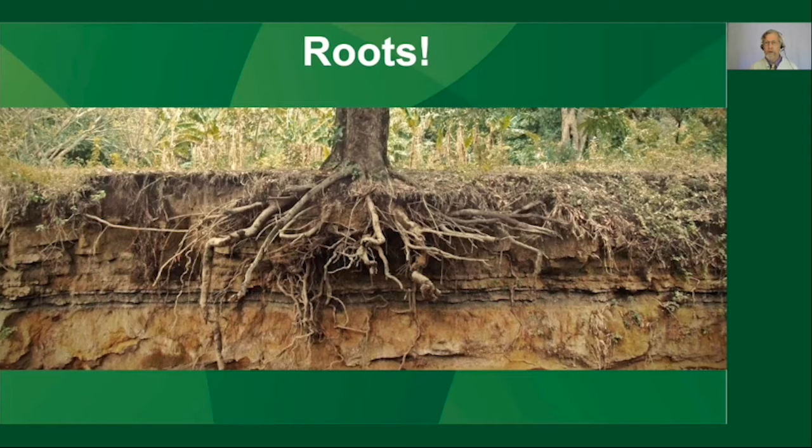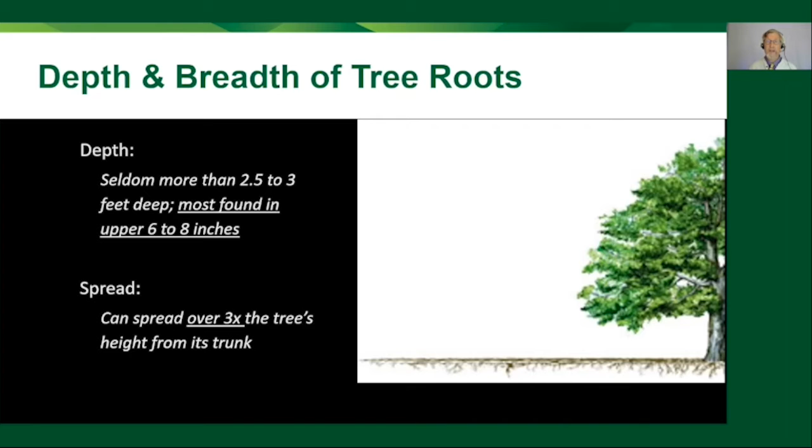And you have to be able to explain to engineers who might not understand how tree roots grow, or your architects or even landscape architects, that usually in nature, tree roots don't grow that deep. And they usually spread very wide, a lot wider than most people think. And whatever you're designing for has to accommodate that. And also there's this idea of a tap root that everybody has ingrained in their head, and people are worried about it when you're growing a tree on a rooftop. Won't the tap root break through the rooftop? So you have to be aware of how roots really grow and be able to educate your team on the reality of root growth.

So let's look at the different types of roots we have. We have the structural root zone and the biological root zone, and how to accommodate these zones in your design. Anchorage really depends primarily on 7 items, and I'll just go through them quickly here. The soil that you're using must resist fracturing. In other words, the shear strength of the soil needs to be adequate to hold the tree upright. The windward roots of the tree, the ones that are growing against the wind, must resist pulling out of the ground and breaking in tension as they move with the wind.

Likewise, the leeward roots must resist buckling in compression, and that soil underneath has to give the roots something to hold on to and something to press against, so the tree won't move too much. The roots must be strong in cross section, so you have to have good root growth, and large roots near the stem of the tree must resist delamination near the soil. So the root contact with the soil, and the soil, is very important.

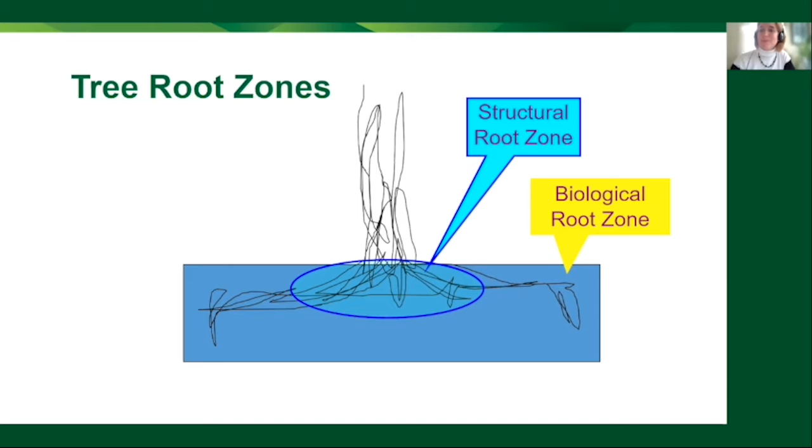And the soil must remain at less than the water content of its plasticity. In other words, once soils become too wet and the tree starts moving in the wind, they become plastic. So it's easier for the tree to fall over than with well-drained soil. Fortunately, most engineered soils for elevated landscapes are well drained, but not very cohesive. So we'll get to that.

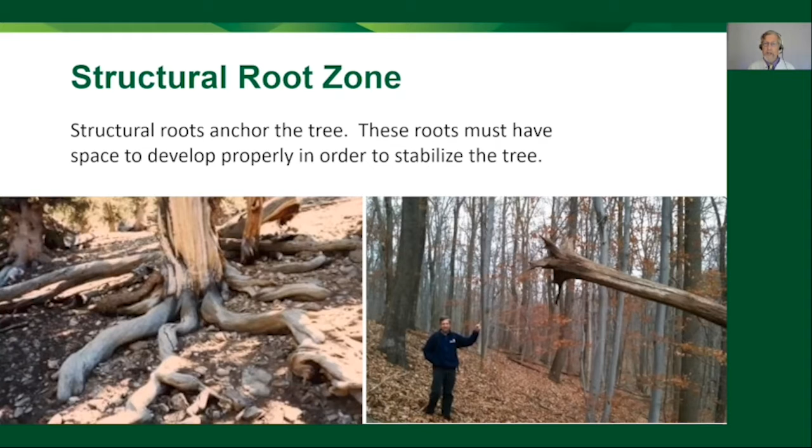Right. So the structural root zone is these large, rapidly tapering woody roots that are closest to the trunk. And establishing these roots early and designing around them helps establish proper anchoring within this system that you're creating to hold the trees.

And you have to talk also about the biological root zone, and all this biology within the soil must be healthy in order for the tree to survive. In a teaspoonful of healthy soil, there are more microbes than there are people on the planet. And in a handful of healthy soil, there's more biodiversity in just the bacterial community than you will find in all the animals in the Amazon forest.

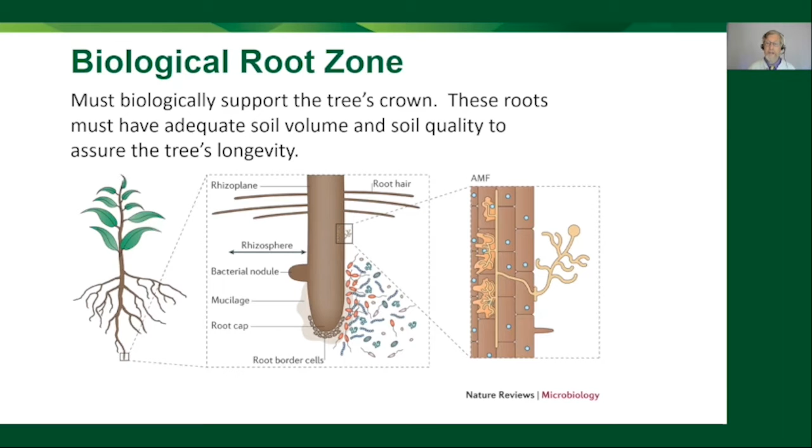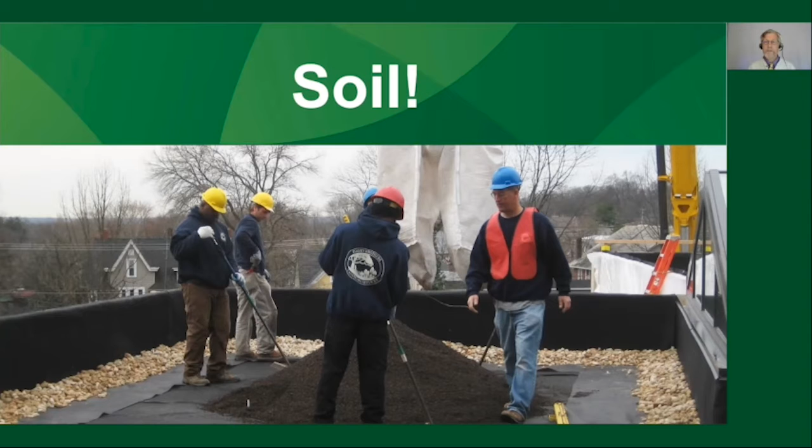And people have to realize that when they're talking about soils and the biological root zone, because really good soils make good trees. That's true for the trees that we plant on the ground. It's also true for trees that we're going to plant on top of buildings as well. So let's talk about soil. All the soil on an elevated rooftop project is going to be manufactured and engineered. And this creates some problems and some opportunities that we're going to go into later on in the presentation.

But a main thing is providing as much soil as possible for that tree. So as we see here, larger trees need more soil. And this is, of course, based on a lot of work that's been done on at-ground trees, but the same is true for trees on elevated surfaces. And so, as designers, we really rely on research like the research here presented by James Urban, summarizing street tree studies on how much volume you need in order to maintain a given size.

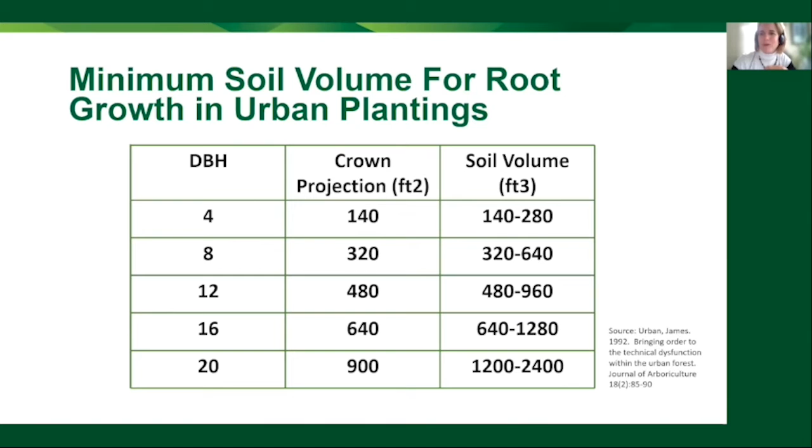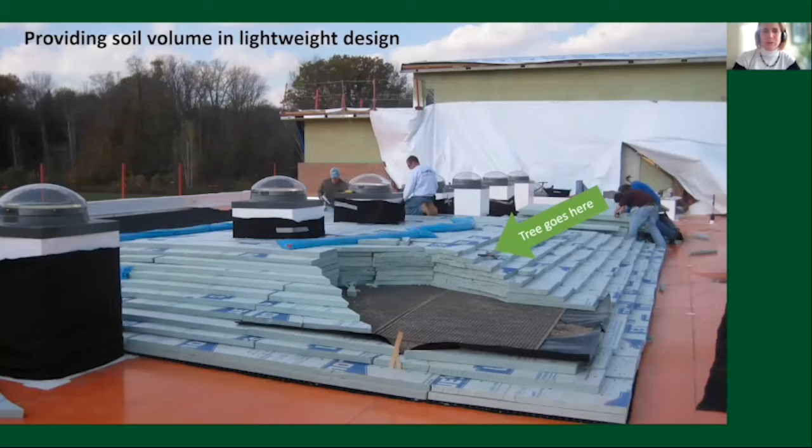So here's one possible creative outcome. This is a green roofing construction. The blue stacked material you see is lightweight insulation. It's creating lightweight terrain within the weight limits we have. The soil's not been placed. So the tree goes in this scooped out area. And then there will be probably 12 or 18 inches of soil, 8 inches of soil, the designer can decide, that gets placed on top of that insulation. So the root volume has a deep zone near the tree and a shallow zone throughout the rest of the landscape for the feeder roots. That's one solution. Go to the next slide.

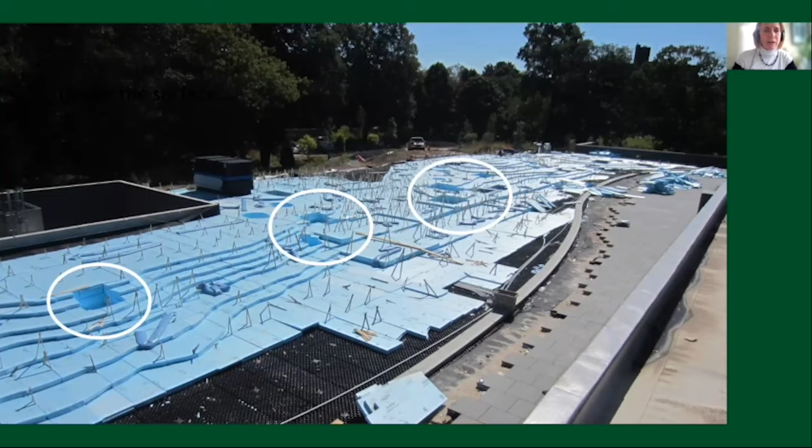Here's another one. This is at Lakeside Prospect Park in New York. And here you see a lightweight landscape that's going in for a new park facility, where the building sort of slides into the landscape. And the white circled areas, again, are areas for trees. You can see they've carved out deeper areas for the tree root ball and the structural root. And so the key question that comes up for us when we're thinking as arborists or as designers is, how big do those need to be?

And I would argue these are really for a smaller tree, that in order to accommodate the appropriate structural roots and the supporting structural root flare, as Jason was saying, those holes need to be sized wide enough that the tree can maintain its stability, in addition to whatever it's doing with its feeder roots and the shallow root zones in between. Make sense?

Just for you arborists, you see that most of the area is this lightweight styrofoam, and the growth medium, it's not really soil, is put on top of that. So you might think we're using a lot of soil media on these rooftops, but actually the blue foam is lighter, and it provides a substrate to hold that soil down and not weigh down the rooftop. Yeah, it lets us create terrain without adding weight.

So here it is. Here's what it looks like when it's finished. This is that same landscape finish. So the trees and the shrubs that you see on the right-hand side of the photo are all on structure. Those are newly planted on structure. Actually, the trees in the foreground on the left are also on structure. And as Jason said, the methodology typically tends to be more breadth, less depth. That's when I was joking that the tree root geometry sort of works in our favor.

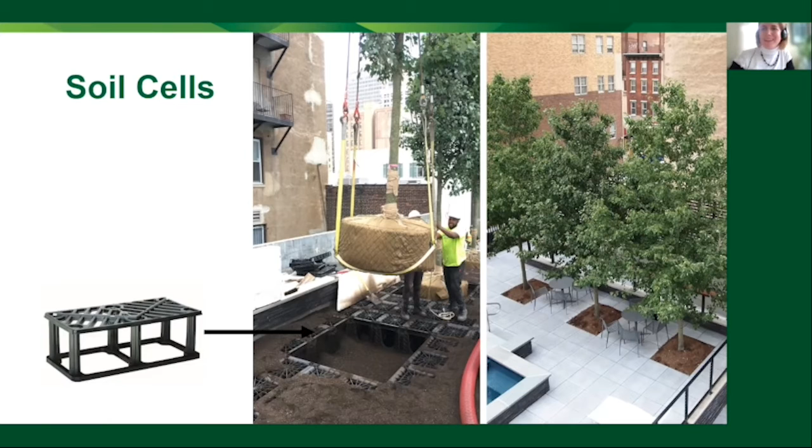If anybody here is in product development or knows someone who's in product development for these kinds of soil cells, modules, it'd be great to have more adaptions and more accessories that let them work better on structure. It's a little finicky taking these on-ground products and getting them on a rooftop. So more good conversations.

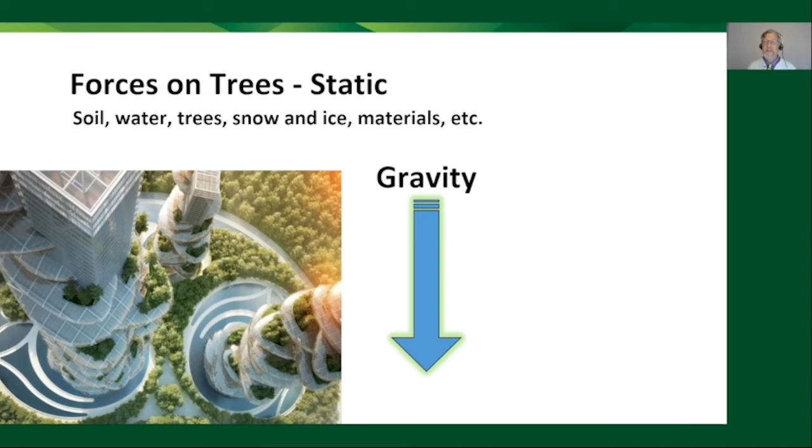So let's talk about the forces on trees, because you're going to be part of a team, and there's probably going to be engineers on that team, and you don't have to understand this, but you have to understand it conceptually. There's static and dynamic forces. So let's talk about static forces: the weight of the tree, the weight of the water, the weight of the rooftop, the roof material. And this is all reasonably understood in the engineering industry.

And they're pretty much quantitatively calculated, but the engineers don't know how much weight a mature tree has. They know how much weight the soil is, but it may be up to you to determine, well, this red maple, we expect it to achieve this size, and this is the weight of that tree. So the engineers understand what kind of static load that imparts to the rooftop.

So soil weight: green roof soil, engineered soil, is typically significantly lighter than normal soil. A common range in the industry is between 65 and 90 pounds per cubic foot. 80 to 85 is pretty safe. As you get down closer to 60, you tend to add cost because the growing medium becomes more expensive to adjust the recipe as the weight gets lighter. Normal soil, obviously, significantly heavier.

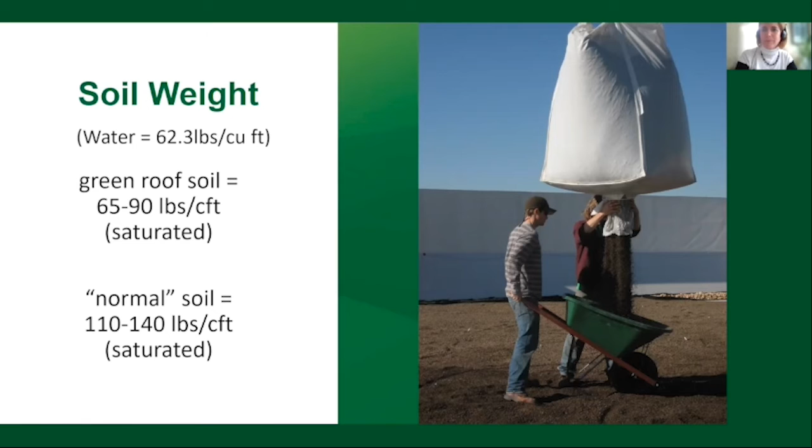And so even though, interestingly, that growing media costs more, it pays off because weight equals cost in other aspects of the building design. As weights get heavier, the structural engineering gets more robust, the size of the beams goes up. That affects architects' ceiling heights. So we find that optimizing the weight is absolutely key to being able to successfully keep trees in projects when we're talking about green roofs. So the lightweight soil pays off.

So when you translate the ideal depths for your size of tree to weight, you get a formula that says something like 30 to 36 inches. That translates to about 240, 250 pounds per square foot for saturated lightweight growing media. So think about those numbers for a second. 240, 250, somewhere in there is the weight of your soil. People worry about the weight of the tree, but I'm going to tell you right now that the weight of the soil is the far bigger driver.

If you think about the tree, when you look at the weight of a 20-inch tree, 3 tons sounds like a lot of weight, but when you convert that over the structural root plate, the bearing root plate of the tree itself, and this is where the math calls for some professional judgment, usually you end somewhere between 20 pounds, 30 pounds per square foot, maybe 40 pounds for a really big tree.

So 20, 30, 40 pounds per square foot is a small component compared to the saturated weight of the soil we were just talking about. So usually we end up somewhere around 300 pounds per square foot-ish. But then, that's where we start horse trading on tree height, tree size, soil depth, and our professional judgment becomes a key part of that conversation.

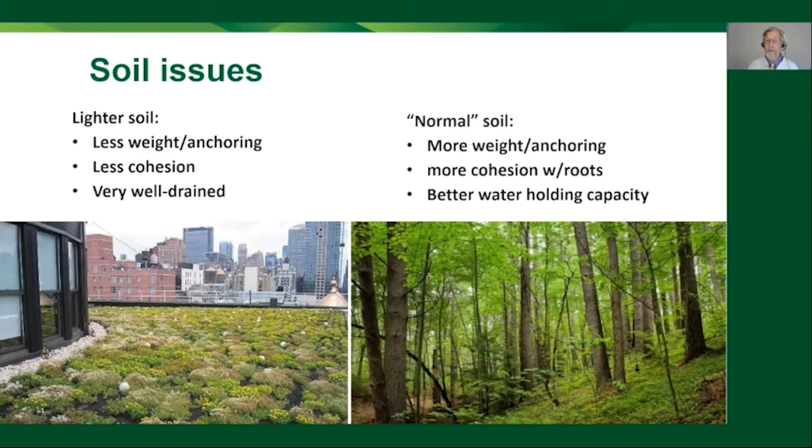And people think, well, let's add clay and things like that. But you have to be careful because, as Laura said, it drives up the weight of the growing medium. So we do have specifications now, but we as an industry definitely need better soil specifications for growing trees on rooftops. I'll add, Jason, those soils tend to be neutral to alkaline. So species selection tends to bias towards trees which are adapted for limestone ecologies. Right, instead of acid ecologies. Correct. But we'll talk about that later.

But healthy soil to me has always been living soil. For me, the soil is the most important part of this equation, because trees evolve with this underground food web, and they really need these fungal associations, these living organism associations to survive. On rooftops, that means supporting this biological component with this soil that's mixed and engineered. It doesn't mean just adding more organic matter to the soil, because that can be counterproductive, because that organic matter may be used up. It may make the soil more friable, so it might destabilize the tree.

What it does mean is that we as an industry need to develop specifications that add this living component to this dead soil as much as possible. It may mean that we need to go to a forest and dig up some healthy soil, and sort of seed it in, put it on top of this manufactured soil to start the process of introducing these living organisms into the soil. So really, we need a little more help with this, and a little better specification to assure long-term tree health.

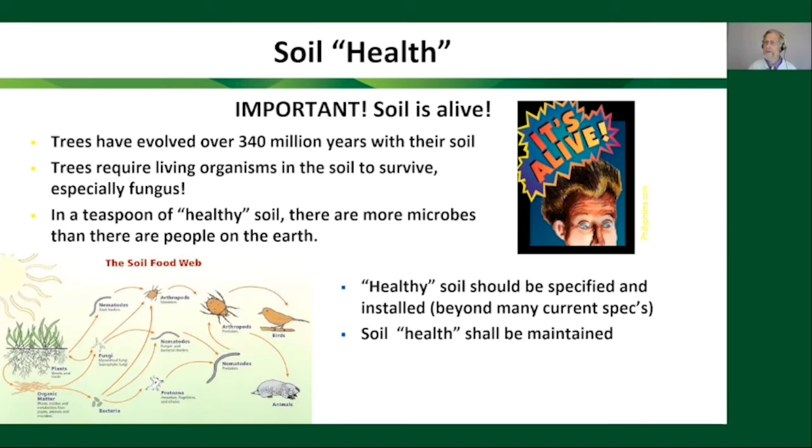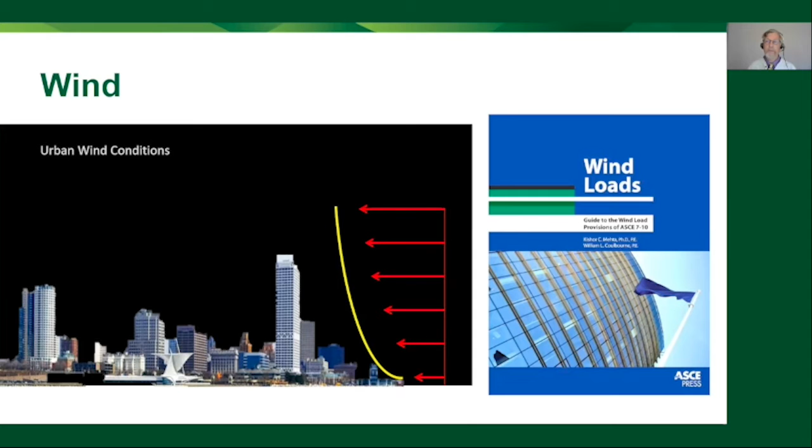So we talked about the static forces, the weight of the tree, the weight of the soil, the weight of water. Dynamic forces are really some of the great unknowns when we're designing rooftop tree gardens, because engineers like to have everything quantifiable, and the dynamic forces do present a challenge, because on trees, especially large trees, they're less understood and there's less guidance in the engineering documents. However, as the building height increases, usually in urban areas, the wind load increases, the wind speed increases. And especially when it goes around buildings that are nearby, you can have very complex wind conditions. But the wind loading on buildings is really well understood by engineers in building design. So we have to consider those dynamic forces of wind when we design these pits.

So again, when the wind comes in from one side, the opposite side pushes down on that roof structure. Now, with what kind of force? Well, it depends on the speed of the wind, the size of the tree, if it has leaves or not. It depends on a lot of things. Conversely, the opposite side of that root plate sort of lifts up in response to the wind. So really, we have to understand these dynamic forces and design for them as well. And it can become very complex.

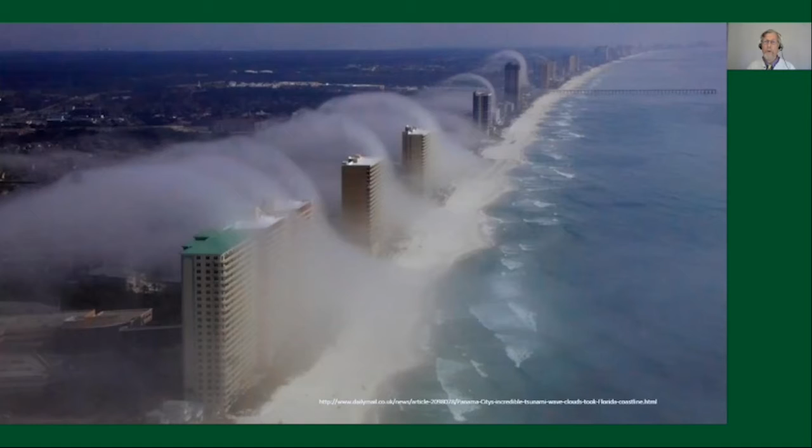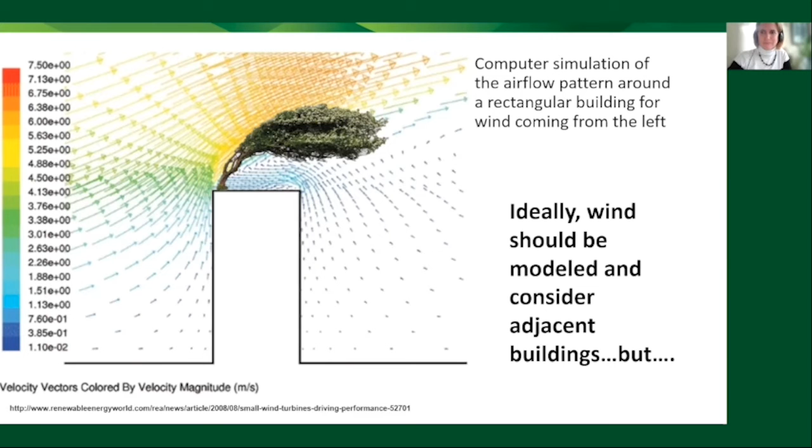So ideally, if you're putting large trees on rooftop structures, the wind should be modeled and should consider all the adjacent buildings. But a lot of times it's just not done. So here, I'll give you some practical examples, which I think are illuminating.

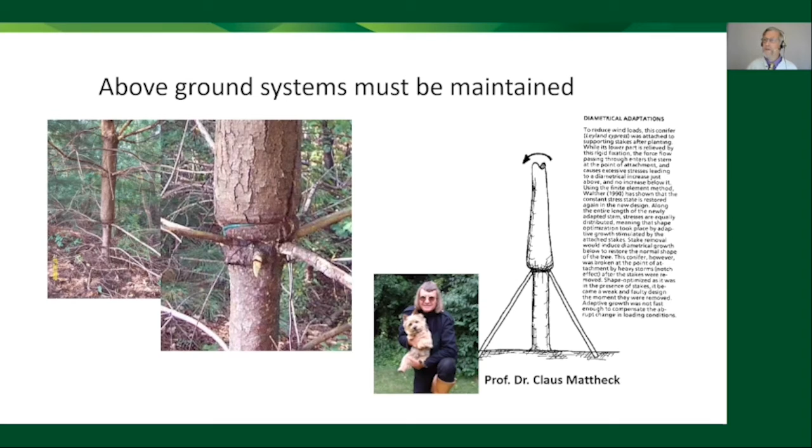So the arboricultural industry has standards for tree guying, and these are helpful to some extent, but usually they're for small or young trees, and usually the anchoring or guying is directly into the ground. When you're dealing with rooftops, you can't just punch a hole in the roof. You have to really design an anchoring system that will not harm the rooftop.

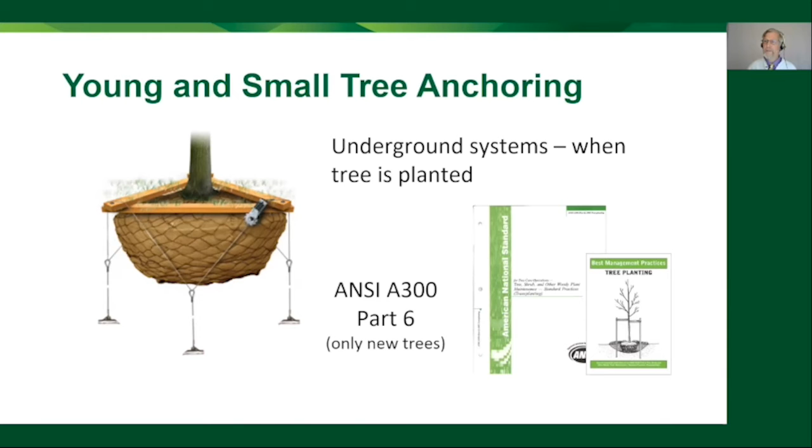So in that spirit, over the years, we have test-driven a number of anchoring systems that are based on a dead man or base plate approach, so that we're avoiding putting holes in the waterproofing, because fewer penetrations of the waterproofing means fewer potential flaws that could lead to a leak. And so here's a really early example of a buried frame that could be used to tether a root ball anchor. We can go to the next slide.

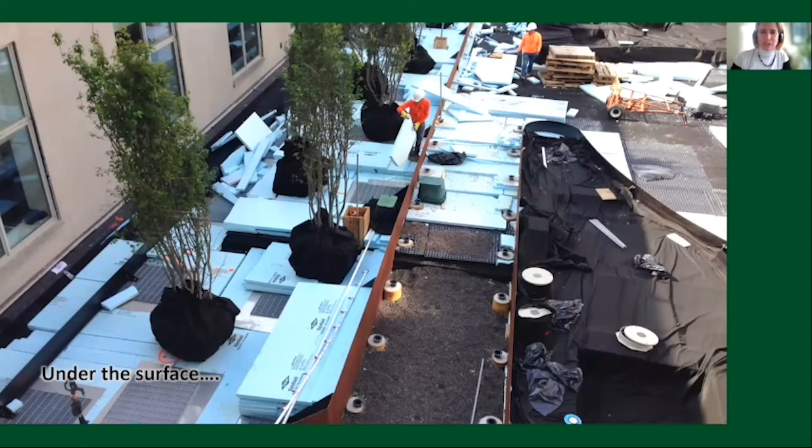Here's a later iteration. This is at Reading Hospital at their healing garden. And you can see the gray metal plates that are next to the trees. The trees are not yet placed on top of them, but those are the plates that are partly spreading out the point load of the root ball, and they're partly serving as a surface to which we can clip a root ball tether. So the tree stands on its own base plate, if you like, in this example. And is tethered to that base plate.

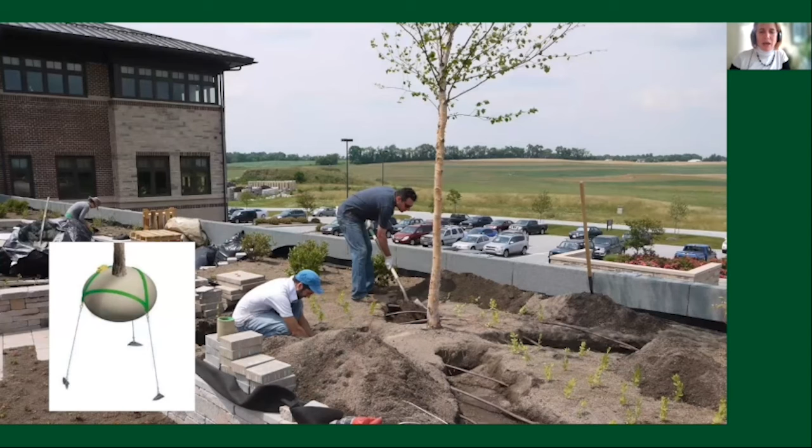So the weight of the tree and the weight of the medium helps hold that tree in the ground, hold it stable without puncturing any of the rooftop. Correct. And that works pretty well in moderate wind settings. I'm going to give you an example here from a high wind setting.

This is in Hanover, Pennsylvania, at Hanover Architectural Products. This is the roof of their warehouse. It's a showpiece, a showcase landscape. And it includes trees. And at the time of installation, these trees were intended to be tethered to the base plate, just like the example you saw. So here you see the tree going in, the brown lines you see are irrigation lines.

And you can see from the surrounding rural landscape, this rooftop gets exposed to a lot of wind. It's not very tall, but it's not sheltered. Get a lot of sweeping winds. Go to the next slide. So here's a photo from installation.

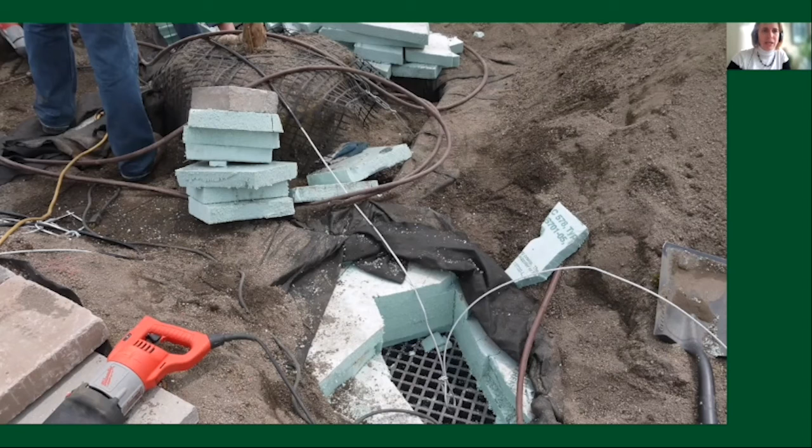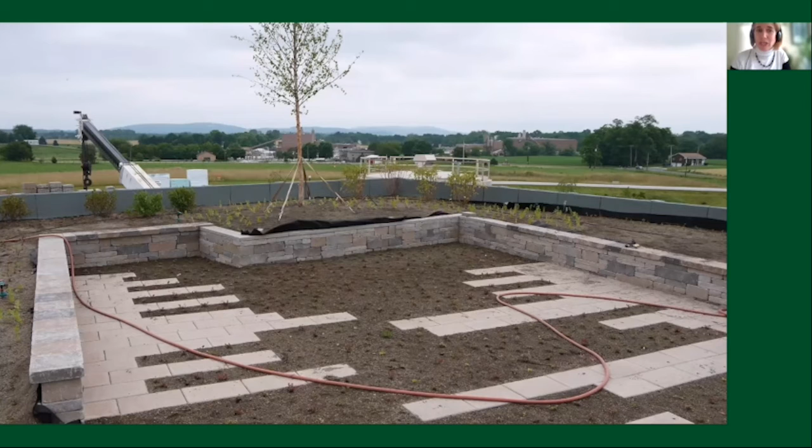They're taking the cables and anchoring them down to the lightweight fiberglass grate, which was a nice idea, but it didn't work very well. And if we go to the next slide, I can tell you that what happened, we had to change gears.

When the tree is under enough wind pressure, that wind is moving the top of the tree. And so even though we were anchoring the root ball, the top of the tree was moving enough that the trunk was starting to break free from the root ball. It was too much top movement in these high winds for this size tree. And so the team had to scramble and provide instead tethers that came further up the trunk.

And as you're probably already thinking, those ties aren't correct. They should be further up the tree and knotted differently. But you can see the scramble. You can imagine the scramble that costs in terms of having to say, whoops, need a different tethering system.

Right. And this is really different again from what we do on the ground because we can just stake the tree, drive stakes in the ground, but you can't drive stakes into the rooftop. You have to have a new and novel system to hold that tree upright. And our current standards don't address this at all.

This is why we need a new set of standards to address growing trees on rooftop structures to accommodate all the engineering needs and to accommodate the roof itself. And to be predictive, we need to predict what conditions we think we're going to have. Go to the next slide.

Because that tree there is just 2 stories up. So even 2 stories up above the surrounding environment can really increase the wind speed on that tree. Now the good news is that tree's doing really well. We keep track, so those river birch are doing quite well.

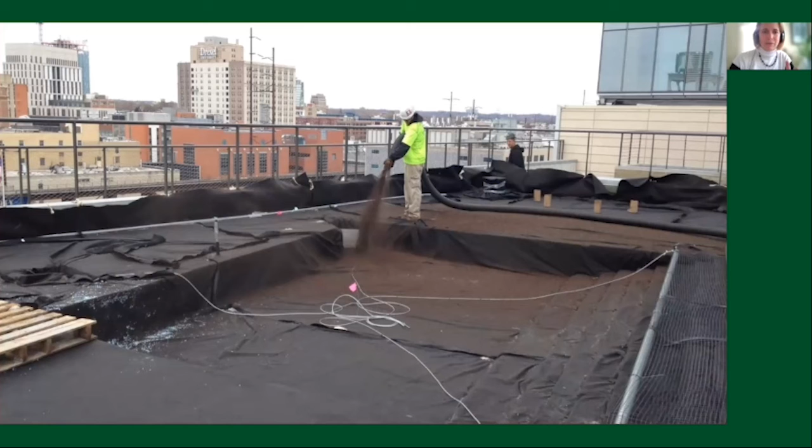Here you see the larger version of the opening and the lightweight insulation that makes the terrain, similar to what we were looking at before. It's covered with a black filter fabric, and the crew is starting to blow the engineered media in. It's brought up from the ground, in this case with a reverse vacuum process.

And the big opening you see is for the tree and the structural root zone of the tree. And here, instead of a dead man or instead of a small frame, we have actually got the ties ready for the tree that come back to a giant tie back, geogrid, which is underneath the soil. And that whole blanket of that whole layer of horizontal geogrid resists pullout the same way a tie back does on a retaining wall, or the same way your tablecloth does when you've got Thanksgiving dinner on it. So there's like a big tie back and curtain rod and tethers.

I just want to stress that these were not out of the box solutions. These were talked about and discussed and invented. They're novel solutions. But as we go and plant more trees on elevated structures, again, we need to have these as examples that work in the specifications. And this one turned out quite well. And we didn't have to put a bunch of holes in the roof or set roof anchors to do it.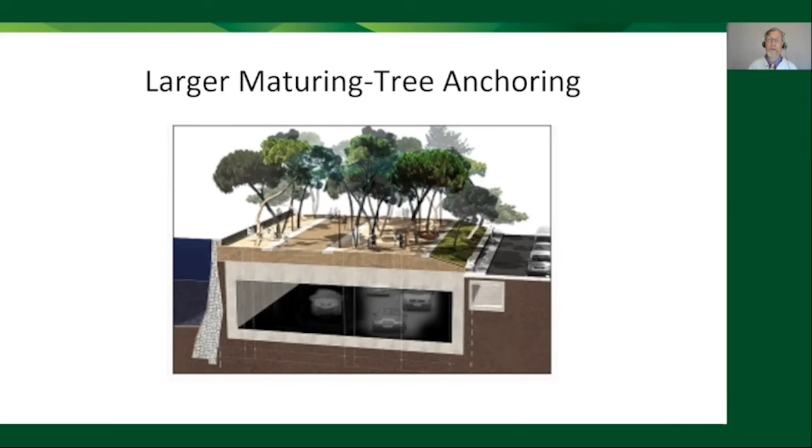So it's exciting in that way that we can work with designers and engineers to help develop these larger maturing tree anchoring systems. So you have to pre-plan for these large trees, especially during high wind events. And we may not have to plan for every tree, but it depends really on your situation. Is the wind going to be great enough at elevation to cause you to want to design these or install them? Maybe, maybe not. Depends on where it is on the rooftop.

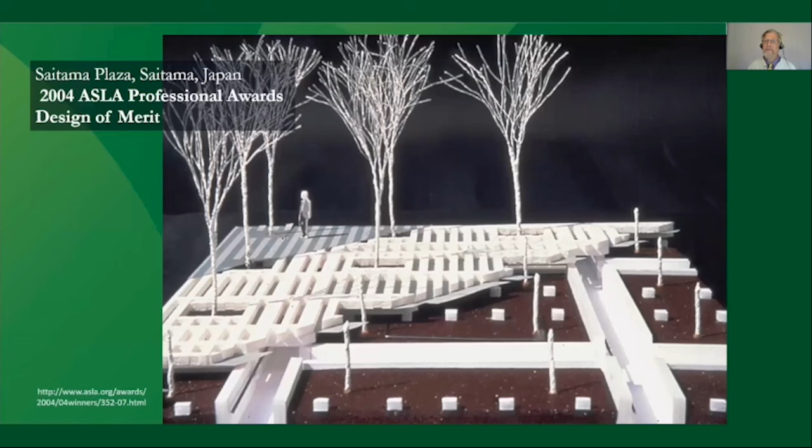So, here we see that the posts are part of the roofing system, and this tree is guyed to those posts so they don't penetrate it. And you can take these systems down if you want to, or put them up. So they haven't been fully fleshed out yet.

Here's a system that uses the weight of the concrete structure, the pathways on top of the trees, to sort of hold the trees into place. So this is an interesting idea, using this concrete grid structure and leaving enough room for the structural root plate and the buttress to develop adequately for these large trees, designing around that beforehand. It's not the weight of the soil, it's the weight of the structure that the walkway is on that holds the tree in the ground. So it's a very interesting project in Japan.

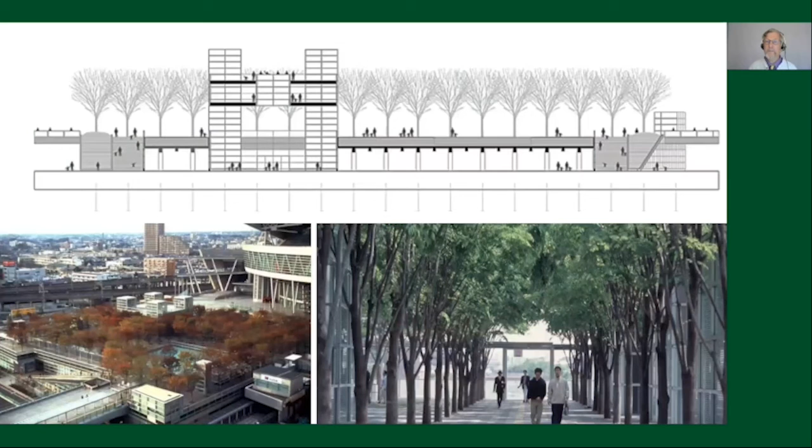And here's a cross section of it. So these are all Zelkova trees that have been planted about 5 or 6 stories up, and they have enough soil volume, and even now today, they seem to be growing very well and are very biologically and structurally healthy. They haven't blown over.

And so these kinds of systems are being developed around the world, but we still need help specifying them. And really, you need to work with your engineering team to do this, because everybody might have good ideas about how to adequately anchor these large mature trees to the structure in a way that doesn't hurt the structure over time.

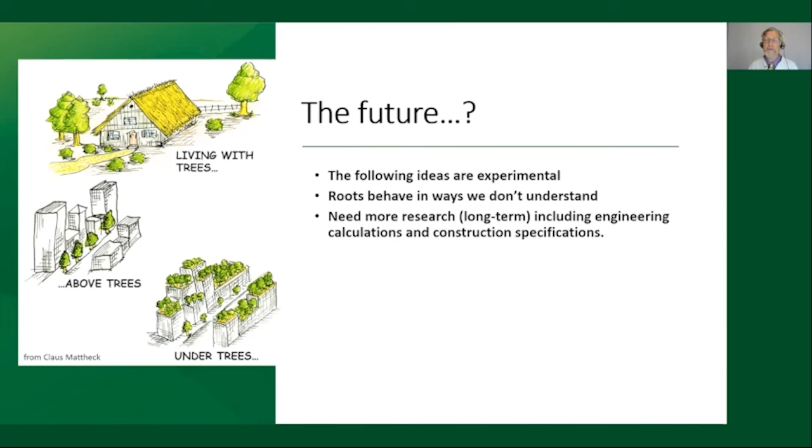So what about the future? And these ideas are experimental. Laura and I have talked about them, and we'll discuss them soon. But roots really behave in ways we don't understand. You can't predict where they're going to grow, and the roots grow in response to the wind loading. So we really need more long-term research on this topic of anchoring trees on elevated structures.

So there's an interesting debate as to what the weakest link is for safety, anchoring trees to elevated structures. And one opportunity might mean putting some kind of stainless steel bars or something across the planting area so the tree roots can wrap around it, grow around it. And this system is anchored directly into the rooftop, and the roots grow around it. So the roots are anchored into their planting bed.

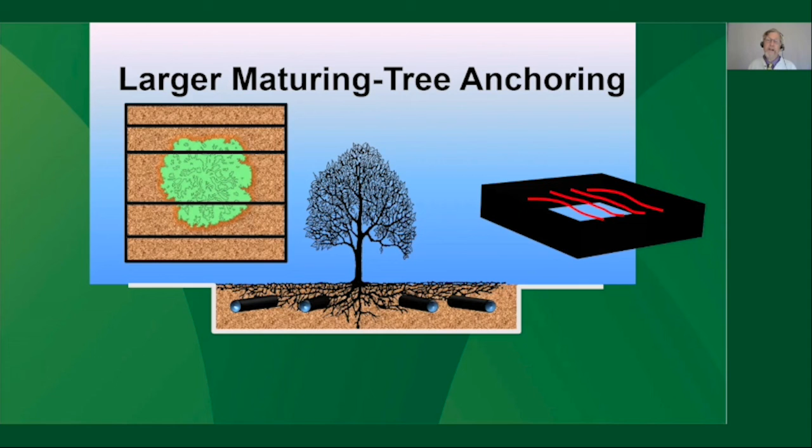So this is an idea that we have to test, and you have to talk to engineers about it, because where these wires or bars attach to the rooftop has to be designed, and all these systems have to be easy to repair, and they have to be removable, because what if that tree dies? Well, you're going to have to take the tree out. You might want to replace the soil medium and work around these anchoring systems.

So you could also, as we saw in Japan, design the planters for the roots to grow under the planters and have the tree anchored that way. So the tree pit, if you will, is part of the overall structure of the rooftop. And there's enough room there for the tree to grow to maturity and the buttress to expand, but it holds the roots into the growing pit there.

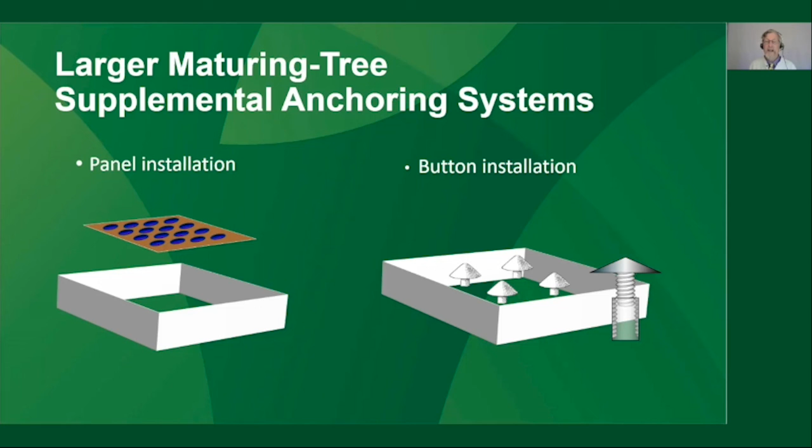Another thing we talked about is putting panels in there so the roots can grow to these panels that are attached to the tree pit. These buttons, this is an idea I had, just putting these buttons in that are screw tops. So when the tree roots grow around it, and when wind comes trying to lift those roots out of the tree pit, they're held on by these buttons that are directly attached to the rooftop. Now, again, this is just Jason and Laura talking. We're not engineers. These things have to be designed so that the engineers can sign off on them.

So there's other considerations, I'm sure you're thinking about this, on trees on rooftops. Anchoring, tree maintenance, the soil, but there's other considerations as well that you can at least be informed of and talk to the building team about when you're considering growing trees on rooftops. So for example, how do we get the trees up there in the first place? Because they sure aren't going to fit in the elevator. So generally there's discussions about cranes or lifts and how to get the tree up there.

How do we get the soil up there? Is it blown up through a blower truck, kind of a reversed vacuum like in the earlier picture? Is it coming up in big super sacks? All those construction logistics need to be thought through, not just for the initial installation, of course, but for any kind of maintenance or repair later. These kinds of operational logistics for horticulture and arboricultural care matter.

Making sure there's water service when they're planted. Certainly, I try to remind everybody early on that not only do they have to plan for the roof being ready to receive the landscape, but to make sure that the water is operational and there's a way to care for the trees when they're put in place. The plumbing needs to be done for the hose bibs and for the irrigation system.

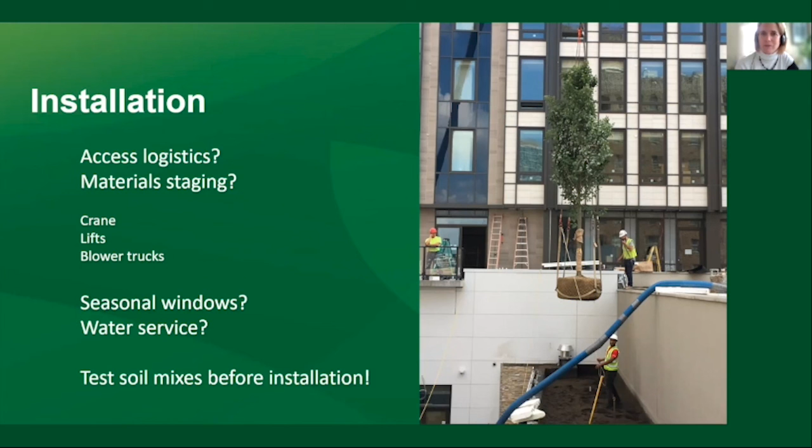And usually it takes a couple rounds. There's always drift, and it takes a couple of rounds often. All right. Plan for it. So, and I'm sure you've thought about, and I touched on, growing these large mature trees on elevated structures, what happens if they fall down?

And yes, you have to design with safety in mind all the time. But trees fall in a natural environment, trees fail as well. And we have to anticipate that in our designs and in the maintenance. That's why trees on elevated rooftops probably need to be inspected every year. And that should be built into your maintenance contract, that especially when they get large, they should be periodically inspected, but that period should be abbreviated; every year would be good.

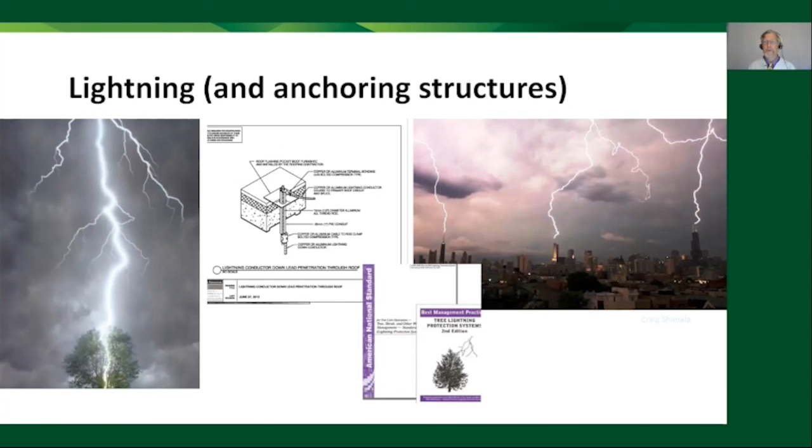So it's not much different than living with big trees anyway, but you have to be even more tuned to it. So there's other things like lightning. We have our lightning specifications, but we usually don't put them on every tree. But here on top of buildings, you need to have an engineer who understands your lightning system, which is in our arboricultural standards, and how to integrate that with the building's lightning system. So you always have to follow the lightning codes for roofs and buildings in your area.

Touched on this, maintenance and post-planting care. Irrigation, as Laura said, you have to have that water up there before the tree is planted, or at least plan for it so when the tree is planted, you can water the tree. And you have to care for these trees during all phases of construction and then post-planting. And this is an opportunity for arborists to have these maintenance contracts, which are specialty contracts, and you could probably charge more for these trees on elevated structures.

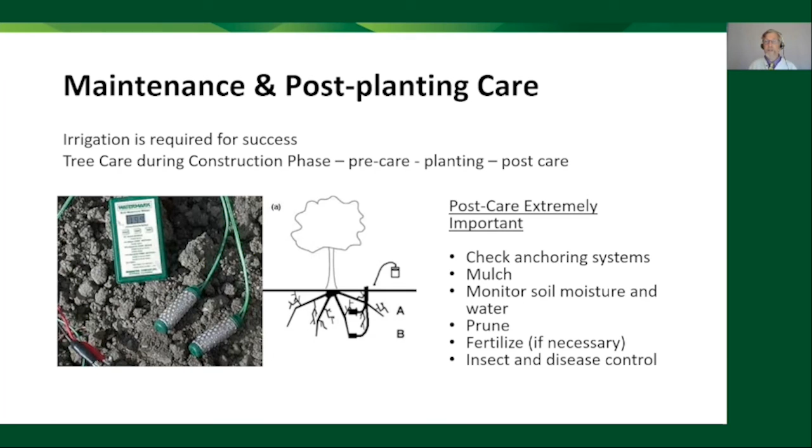So, that involves monitoring the moisture of the soil, because if there's problems with the tree, you have to go in and diagnose what's going on. Is it something chemical in the soil, or is it something water related, or what? Maybe you add fertilizer, maybe organic matter. Of course, insect and disease control is always important, especially since a lot of these rooftops are gardens. You really want these trees to look good and perform well in the landscape.

So, that's a lot to think about. It's a lot to be talking to our clients about. But the good news is trees are absolutely possible on structure. People really enjoy having them. And I think they obviously have a lot to offer for the quality of our outdoor spaces in cities. Big things, again, to recap: adequate soil volume, good quality growing media, healthy soils for long-term tree survival. No surprise, but especially important on structure because we provide all of it. And again, that's your best anchorage system.

So all the great ideas, but having enough soil and having a good practice, setting the trees up for success, obviously, is the right thing to do. Certainly high wind and understanding weather patterns is going to be important, and you have to give them forethought. Anybody who has ideas about anchoring systems or is interested in more discussion about that, there's lots of room for innovation, and we'd always be up for more discussion about how to advance this aspect of the technical design.

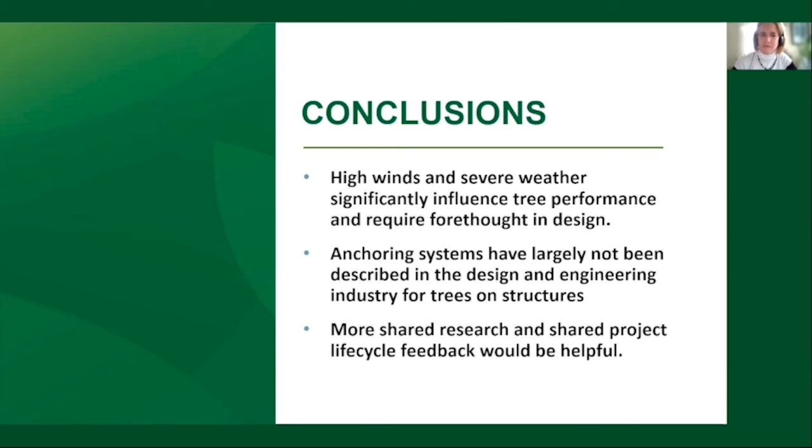So, again, trees on rooftops create many opportunities. They offer many benefits, and all these considerations that we discussed during this presentation are all solvable. It just takes money, time, sharing of expertise, publishing successes, publishing the lessons learned, and advocating for having green infrastructure in our elevated landscapes. These projects do excite people when you show them these pictures. They're like, wow, that looks great. And it's part of greening our big cities in the future. I think this can become and will become, just like green roofs have become, a big component in greening our cities.